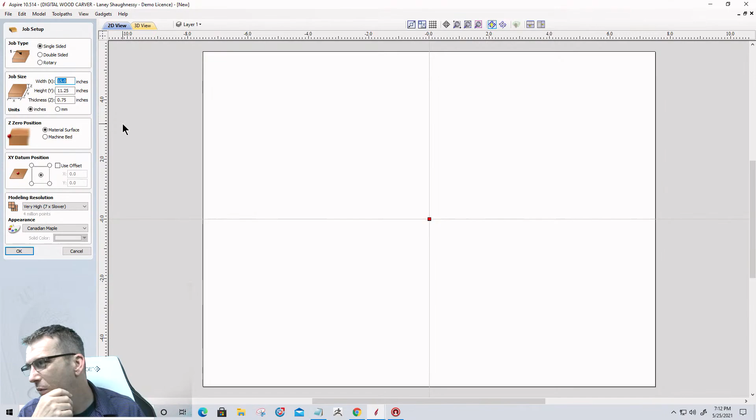The things that would be pretty basic would be... what do we call them? Dresser type caddies. Pretty cool little caddies where dads after a hard day of work can come in, offload their change and empty their pockets, and have a nice little organized place to keep those things.

There are different types of signs and plaques that could be made. What I want to do is focus on making a box, kind of a keepsake box, or a dad's memory box, that might have some elements on it that could really register with your dad.

Register, if it might click, might be fitting. He could be a military guy, a veteran, a peace officer or a firefighter, or he could be just a carpenter or a handyman.

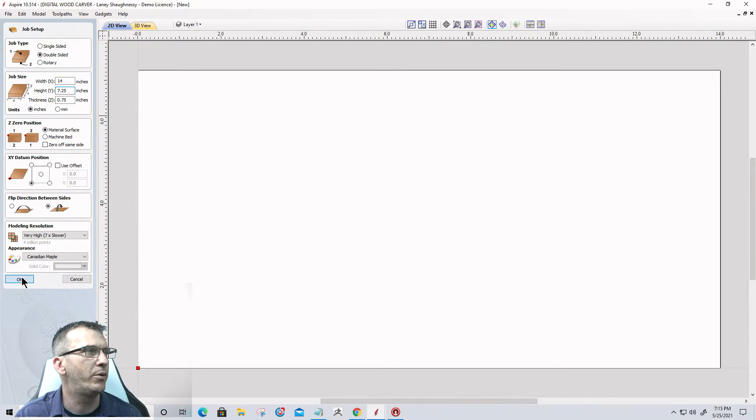I believe 14 by 7 1/4 — most people's CNCs, unless they're working on a small Piranha or something, will be able to carve that project, so it should be fitting for everyone. Again, I am in Aspire, but the things we're doing can be done in any of the softwares. Don't let my working in Aspire this evening make you think, oh, I don't have Aspire, I can't do this — yes, you can.

You very much can. So the first thing I'm going to do is lay out my box. My box is going to be 14 inches overall length, and it's going to be 6 inches tall, not 60, 6 inches. And it's going to have square corners.

Let's go ahead and get that on the board. For right now, I'm going to center it on the board there, so I have this upper area for clamping, this lower area for clamping, as well as being able to do alignment pins. That's where I'm actually going to start tonight.

I usually do the alignment pins last, but I'm going to go ahead and draw them in. Somewhere right over here, I'm going to throw in a 1/4-inch diameter hole, right about there, and also down here. Now, because of the method I'm going to use for the alignment pin holes, they don't need to be perfectly aligned or in the same place in the same corners.

I just need 2 holes. They could pretty much be anywhere, and I'm going to go diagonal with them, but they don't have to be exactly in the same spot. So that's going to be my alignment pin holes in the waste areas here.

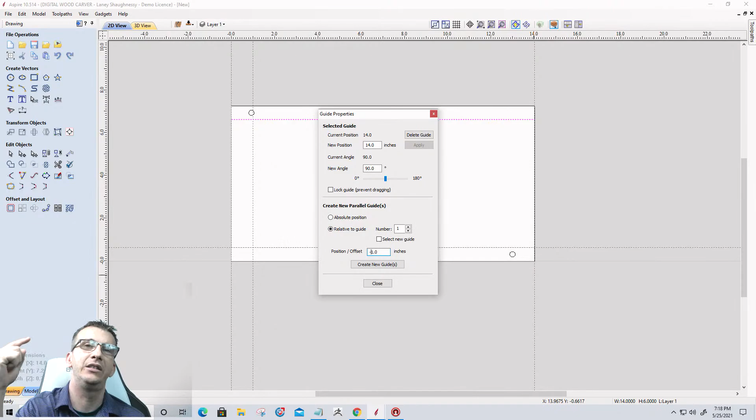You can rotate that guideline, you can create relative guidelines parallel to it, and that's what I want to do. I want to create a relative guideline 1 inch away, positive because I want to go to the right. Now on the guide on the right hand side, I'll right click and do another relative guide, but this one's negative 1 inch because I need the guideline to go to the left. So we're going to create that guide.

Now I can take my rectangle and go into node editing mode, zoom in really tight on the guideline, and insert a point right on that 1 inch guideline on the right, then zoom in and insert a point on the left side. If I zoom in more, you can see I missed my mark, but no problem, I can just drag that over and snap it right to the guideline. That's why I want to zoom in really tight to make sure I'm on the guide. Even here, I missed that one as well, so I'll snap it right to the guide.

Now right in the middle, there's always a little invisible looking clear box, and that's the center line, the center point between two nodes. On a line, arc, or curve, you usually have a center point identified, and I'm going to put my mouse right on that center point and insert a point there as well.

So now what I've basically done is the bottom of this box is going to be one side, and I've divided it in half, so I've got about a 1 inch foot on this side as well as this side.

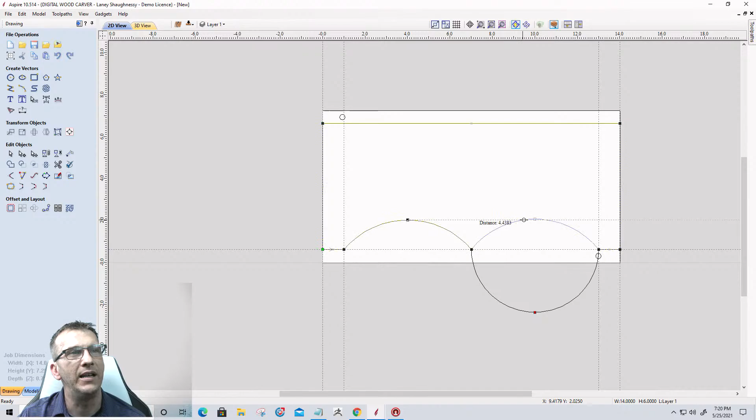And I'm going to do the same thing on the other side. Right click on the line and change that to an arc. Now I want to pull this one up and align it to here, but I need to wake up this node first to get that dotted line to shoot across. As long as I have my smart snapping and geometry snapping turned on, when I wake up a vector, I'll get that reference line, and I can snap right to it, so that way they're both the same height. That's going to be important for me.

So now let's get out of node editing mode. I don't want this sharp center here, I'd like a nice little curve, and that's going to be a fillet. With the fillet tool, I'm going to go with about... I think 1.5 is going to be too much. No, actually 1.5 is going to be good. I'm going to go with a 1.5 inch radius, normal fillet there. When I click on that center point, let me undo that... when I click on that center point there, it'll create that fillet. So this is going to be the side profile of this box here.

Now that I have that, I can go ahead and get rid of my layout lines. I'm on the top corner of my rulers, and I can click on that button to hide them, so turn them on and off. So that's cool.

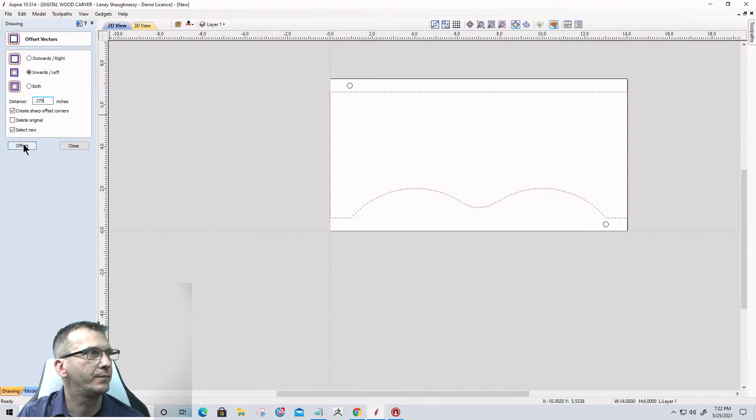All right, so now I'm going to take the profile that I've just created of this box side, and I want to offset it inward, probably about 3/8 of an inch. I think that would look pretty good. I do want to keep sharp corners because I want these corners in the top to be sharp when I create that offset. So we'll create that offset, and that's going to create this little window in here.

Now, within that window, I'm going to go ahead and draw a rectangle somewhere in here, and let's go with a rectangle that is a full 10 inches by 2.5.

I want to make sure that this is centered inside of this window. Now, if I go full center, straight center, it's going to bring it down low here, because it's basically centering it off the bottom of the feet and the top of the part.

I just want to make sure it's centered left and right. So I'll select this inner rectangle first, then select this inner vector last, always last, and align left to right to get that centered. If I tried to center completely, it would bring it down too low. I don't want that, I just want a nice layout.

I want to gauge my distance and make sure I'm pretty well even across. So I'm going to use the arrow keys on the keyboard and just bump it up, right about there. That looks good, eyeballing it rather than using an actual measurement.

And here I can do whatever - I can put in some text, I can put in a nice design, I could put in something cool that might relate to pops and stuff like that.

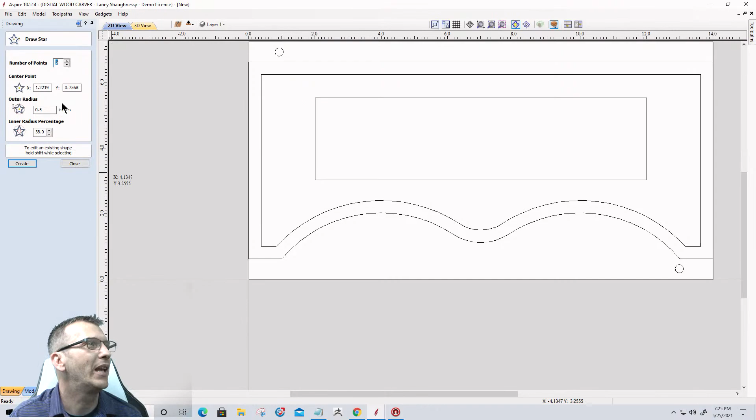I'm going to go ahead and create a star here, and size it down a little more appropriate - that's a little too big. Let's size that down to right about there.

Now I'd like to have them come around 3 sides or all 4 sides, whatever the case, and I want these stars to follow the path. So I'll take this inner rectangle and offset it outward a certain distance to use as my path for the stars.

Let's offset that rectangle outward, let's see, 3/8. Let me gauge this real quick - if I were to center that star in there, oh yeah, plenty of room. So let's undo that. Alright, 3/8 is good.

Now I'm going to use the follow tool, or copy along vectors tool, where I can take one object and copy it along another. Whatever I select first is the object I want to copy, whatever I select last is the path I want it to follow.

So I want to select that offset last, holding the shift key down when selecting more than one item, and use that offset tool - it's down here in offset and layout, copy along vectors. I'd like either a certain distance between them or a certain number.

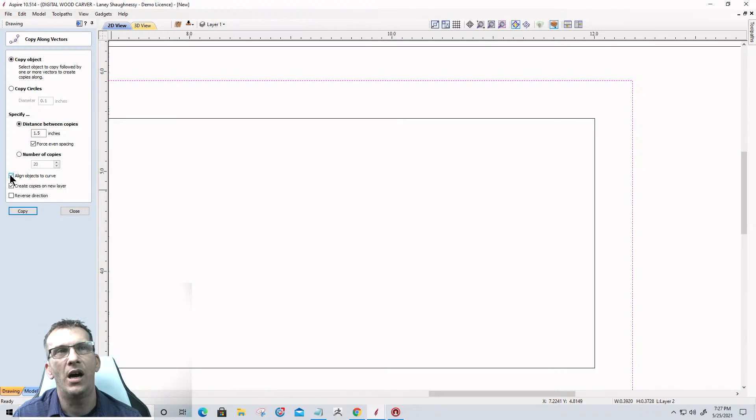Now, you see how the stars started to turn and rotate? I don't want that, I want them staying vertical. So let's undo that and uncheck the box that says Align Object to Curve. We'll uncheck that and pull that in. Okay, and everything landed almost perfect.

I'm a little off on my corners and everything, but I'm going to fix that right now. Everything else I like, but the corners I want to change.

So for this corner, let's start up here, and I'm going to snap the center right to that corner. Now, interesting, let's take our guideline here for a minute. Let's close this tool for a second, and if I take my guideline out of the top ruler here and bring it down, I should be aligned perfectly. Good.

All right, so let's do this one as well. And that one already is centered, so that's good. Down here in this corner, let's go ahead and pull this down and snap it to that corner. And over here, let's take this one, and that one is good as well.

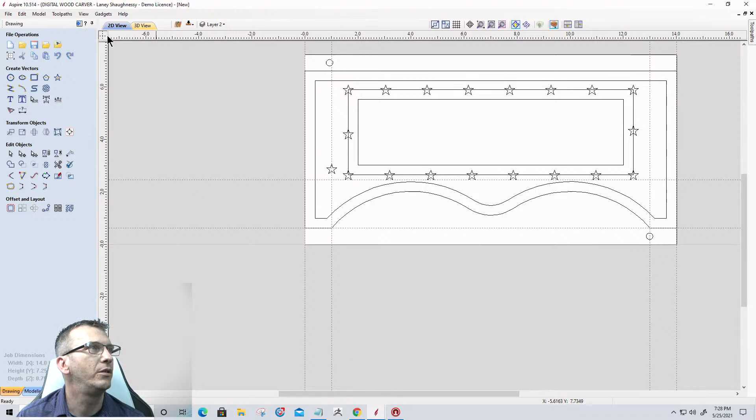Again, I can take my guideline just to make sure I can snap to the bottom of that star and just make sure that they're all nice and aligned. Okay, so I have that alignment. Let's go ahead and turn those guidelines back off, and I can delete my master little star there.

When you're creating stars, by the way, guys and girls, a little bit of a pro tip for you. When you create your star, your inner radius should be 38%. 38% gives a nice straight top part of the arch. So if I pull a guideline down on this star here, you can see that top line is nice and straight across.

If we were in, let me hold my shift key down. If I were to change that to, let's say 43, you see how it's angling up? Or let's say that I was at 35 - see how it's angling down? 38 is going to be your number.

And that, if you're ever doing stars for flags, for the unions or anything like that, it's 38. 38 is where it is. And that top leg has to be straight across. Okay, so all right, let's go ahead and turn that off.

Once we've done that, we don't need this vector anymore, so I can delete it. And we could have something like this, where the stars are kind of coming around. They're going to be raised. They're going to have nice points and everything to them.

They're going to be raised up and all. If you're in Aspire, you could just build that model - you could build those stars up as a model and stuff. But in Desktop and Pro, what we're going to do here, we're going to use the V-Carve toolpath to kind of pocket out that area to raise up those, give those stars a nice raised look. So we're not doing really any kind of model creation on this, but you could, right?

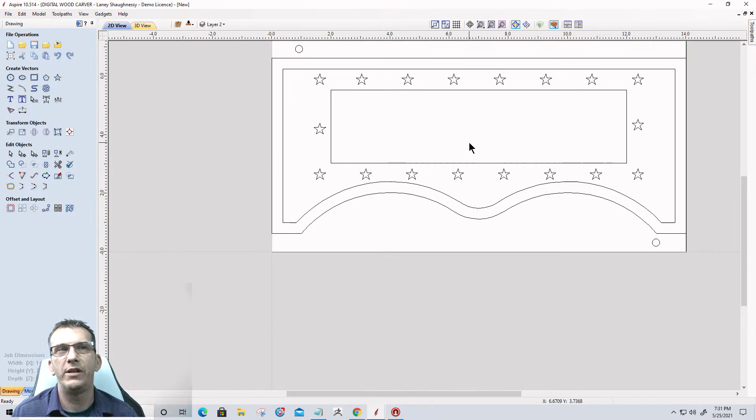And we're going to have two sides of this box, and they're not going to be identical. They're going to be very similar, but try to change it up a bit. Put something different on one side versus the other. We're going to create side 2 here in just a minute. We're going to make a copy and stuff, but try to create something a little bit different, a little bit unique, and things like that.

Now, since I said that, let's go ahead and do that right now. I'm going to select this here, and I'm going to hold down my control key, and I'm going to drag a copy right straight down. Hold that control key, and I'm just going to drag a copy down, which is going to basically kind of represent my front and back side, or whatever it could be.

Now, the joinery on this box is super simple as far as that goes. The joinery is going to be basically just kind of a butt joint. Since it is a two-sided job, we could do a half lap kind of joint type of thing. But it's going to be just a very simple assembly on this box, just kind of a butt joint, glued together. And we do need to create a groove on the back side for a bottom panel, at least.

So we've still got to create the bottom panel, the two sides, and the top. Before we get into the next step here, let me answer a couple of questions.

Laney, do you do classes on the weekends? Chris, are you talking about video classes? Or are you talking about the training classes that I do with customers that subscribe to the training?

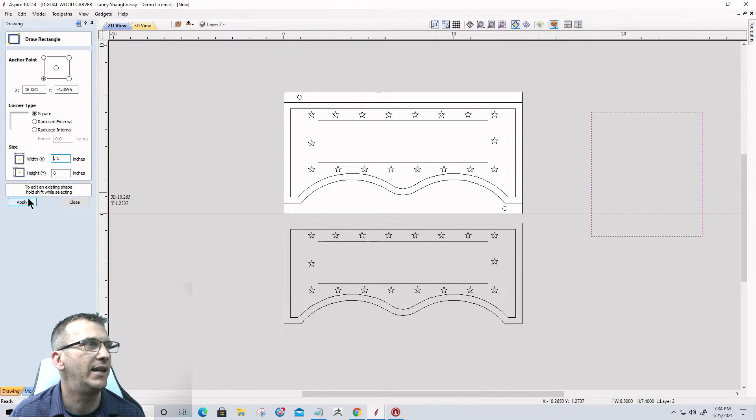So let's go ahead and size that. I'm going to need 2 of them on this side, so I'll hold down my control key and drag them down. What I'm basically doing here is laying out all the parts in one job, one layout. What I'll end up doing depends on the size of my machine, and now I have a 40-inch cutting area.

For the most part, except for the lid, I should be able to create the design on a long board and cut out all the sides, the front and back, and the 2 sides out of that one board, flipping it over as needed. But right now I've just got it laid out on a single piece here for whatever reason. We'll change that up in just a moment.

So we have our 2 sides. Now as far as the lid goes, we're going to do something decorative on it as well. We know the overall width should be 7 inches overall, and our box is going to be 14 inches in length. So 7 by 14 is what I need this lid to be. Now basically I've got all 3 parts laid out.

Now I am going to do something decorative on the sides as well. This is the cool place to do some type of medallion. It could be a military insignia, a fisherman if they're into fishing, a bow hunter, a deer, whatever they're into. Make it pretty cool for them. It could be a hodgepodge of different things too.

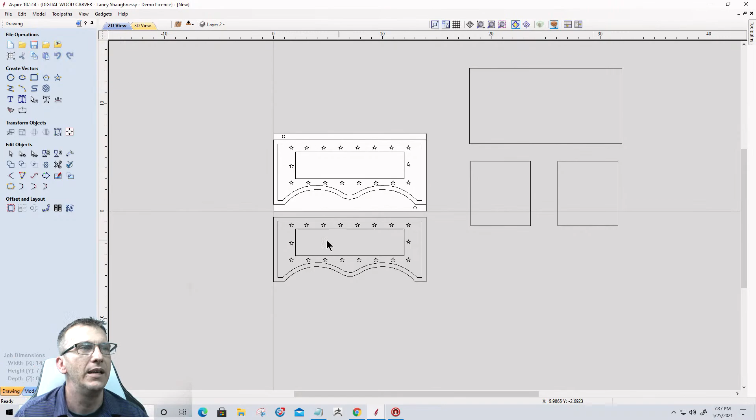But I'm laying out everything here, and then we'll start getting the projects ready to lay out so we can create our toolpaths. Now like I said, on the other side of the box, I don't want the same kind of layout—I do want to do something different over here.

So I'm actually going to remove the stars in that middle box from that side so I can do something different over here. Now, if I was going to put my dad's name on one side, I might write a nice little message to him on the other. Or I might create a nice cool scenery using some of the clip art in the Vectric software, like a fishing scene or an outdoor scene using those models. This is where you can really start to customize. If you're new to Vectric and haven't done modeling, it's not as complex or difficult as one would think.

There's a lot of videos on Spindle TV you could watch. They are longer videos, but the shorter videos in the help section of Vectric talking about model assembly are straight to the point. When you're bringing models in and laying them out, those quick little tutorials in the help section of Vectric will guide you very well. Some of my videos may help you too, but they're a bit longer to absorb. We're going to be changing that format in the upcoming months, making some really poignant, to the point videos that aren't so drawn out.

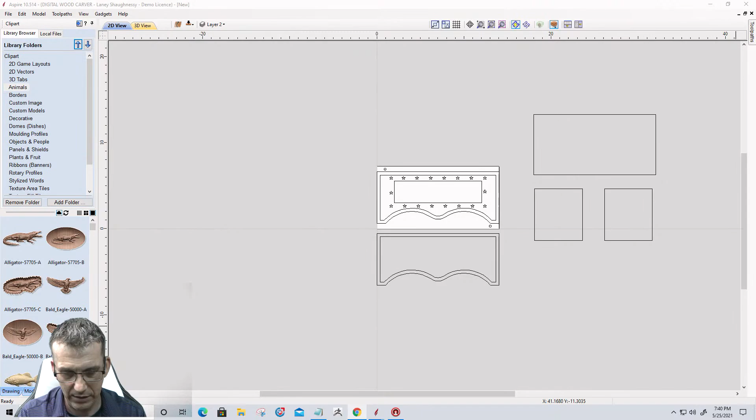My dad, when he was alive, was a country boy, all American and everything, so it might be fitting for him. I actually don't know if he had any military service or not. Like I said, I was kind of estranged from my father, so I don't really know what his history was before he passed.

But it could be something pretty fitting for you guys to think about. All right, so just for demonstration purposes, I'm going to go ahead and put in a name here. I don't know what I'm thinking here... Cook. And I'm going to throw this in for my grandfather, he helped raise me. So let's size this up.

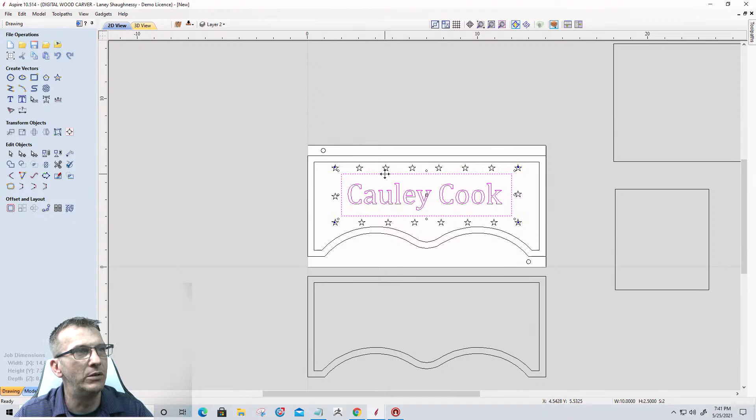I want to hold down the shift key and select that rectangle, and use my alignment tool to align to the center of that last selection, making sure it's centered in there. Okay, so that takes care of one side laid out.

Now that I have that side laid out, I'm going to go ahead and grab it, and drag it off to the side. I'll be able to put it back when I'm creating toolpaths. I'm going to use layers in just a moment, and we're going to separate our top, bottom, left, right vectors into layers to really organize things. But now I'm going to take this vector down here, this other side, and center it on my material, just to pop it in place so I can start working on it.

While we're here, let's go ahead and set up our layers. For layer 1, I'm going to rename this to be my left side. Layer 2, I'll rename to be my right side. I'm going to add another layer and call this my front panel. Add another layer, my back panel. And my top.

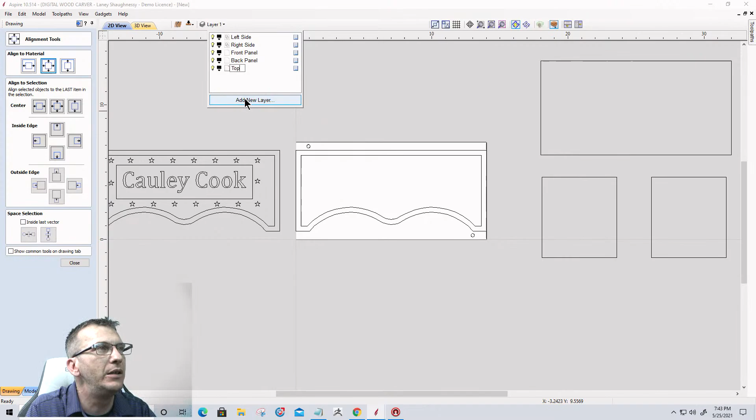I don't need a layer for the bottom, because the bottom is just going to use a piece of plywood that goes into a groove. Not 1/8, I'm sorry, is it 1/8? Hold on, is it 1/8? Quarter inch birch plywood, but the nominal measurement is 7/32.

Let me see here, plywood measurements. I used to know this stuff off the top of my head. Quarter inch is 7/32, yeah, 7/32. So that's your actual measurement. And also I got to remember it when I make my groove on side 2.

All right, so for side 2, I do want to add a little bit of a 3-dimensional element to give you guys some ideas about that. Or we could trace an image and create it as a V-carve and still have that kind of raised effect. Either one. If you don't have, well, everybody should have some kind of models in their clip art. Desktop came with models, Pro came with models, and Aspire came with models. We're not creating anything from scratch here. You should have some kind of models, but if not, we can trace some images and create some 3-dimensional designs by doing that raised effect.

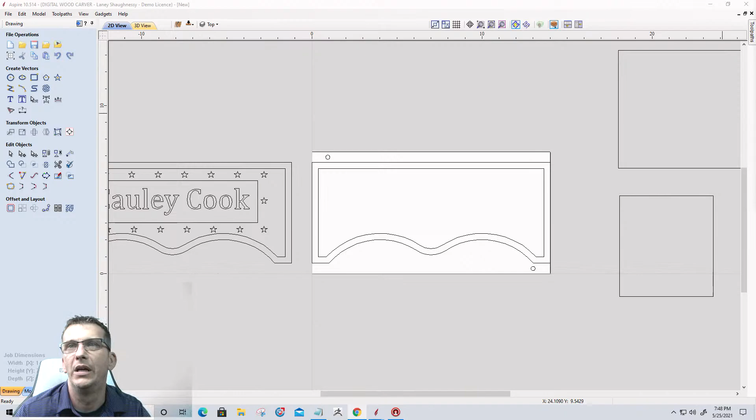So do I want a jumping bass or do I want a regular one? I've got different images that I've pulled offline that I can choose from. Let's see here. I tell you, this one, this image will give me a lot of options to choose from. Let's pull this image in. And let's go into our downloads. Let's see, there's, oh, that's a little guy. Where's my other one?

All right, this one will give me some options. Let me pull it over here. I think I'm going to go with this bottom one down here.

So let's go with a trace tool, and let's grab this, turn the fading off. I'm going to pull this up to 75 here, and I'm just going to draw a box around this guy right here and trace him.

And we can go ahead and get rid of that piece of trash there. This one here was similar, but it's really small, low quality, so it wouldn't be a good tracing. I'll go with this one here. Let's pull this over.

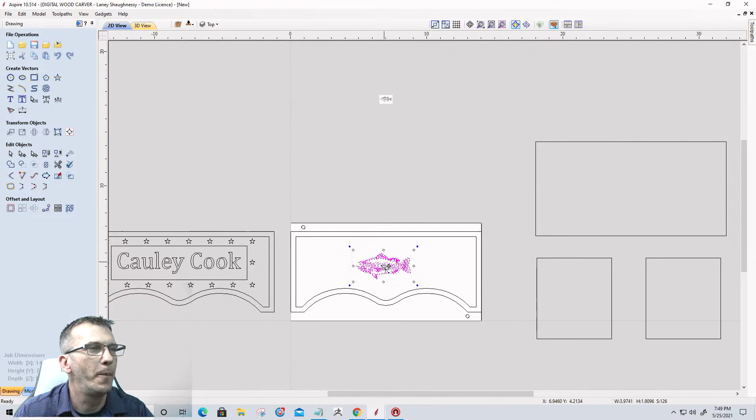Now my grandfather, he loved bass fishing, but he really loved speckled perch and all, but I don't have any picture right away that I can pull up of a speckled perch.

But now I want to align this left to right. Whoops, don't do that. I want to group that together first. Let's group this together. I'm going to hit G on the keyboard to group that together. And then I'm going to hold down my shift key and grab this here, and I'm going to align left to right to get that centered.

And I also I'm going to put a couple of fish hooks here. Now I'm actually going to draw those in. I'm going to draw that in and everything.

So let's see how well I can draw. I'm not sure. Let's see how well I can draw a fish hook from scratch.

Now I always, when I'm drawing shapes, I always start off with a rectangle. It kind of outlines how big I want the shape to be, and from there I can start to kind of create my shape.

So let's go here. We'll have a little narrow leg, and let's create a bit of a circle. Snap that to there. Let's bring that up a bit.

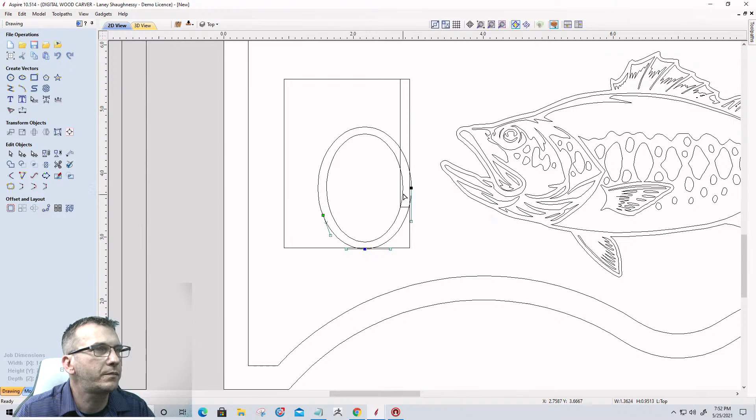All right, let's go ahead and go into do some node editing. Let's cut the vector down here and here. Let's cut the vector on this side as well. And here also. Let's get rid of this top half. Oops, what did I miss here? There we go, and get rid of this top half.

Perfect. Let's go ahead and move this out now. Node editing is your best friend when working with things and stuff.

Snap that there. Let's pull this one back here, and let's do some trimming. Trim, trim, trim. And don't worry about that jag. We're going to fix that in just a minute. That little jagged thing in the area there, we're going to fix that in a second.

In here, I'm going to actually do a three-sided, four-sided star.

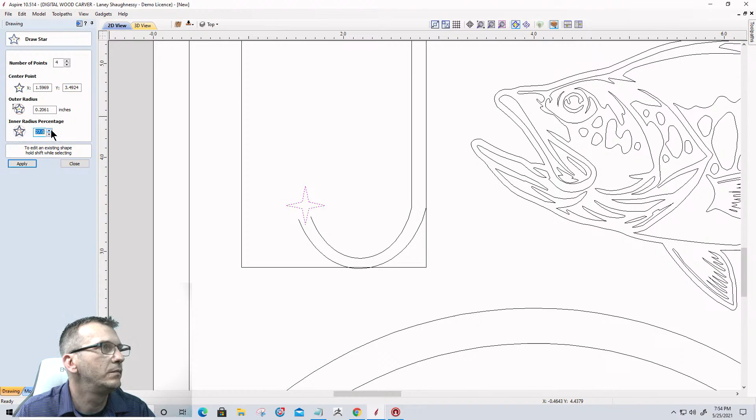Let's pull this down here for a minute. I want it a little bit narrower, so I am going to reduce that inner radius a bit. 20, not that narrow, let's go 25. That'll work. All right, let's size this up.

Now, of course, it would have been much easier to find a picture of a hook and trace it, but you guys aren't going to learn anything if we just keep tracing images.

We're going to go into node editing mode, and I'm going to select these two nodes right here, and I'm going to use the down arrow key on my keyboard, and I'm going to pull them down to create the point of that hook.

And then I'm going to go ahead and lower that. Oops, not that one. I'm going to go ahead and get out of node editing mode. Let's lower this down a bit. Right about here. Node editing.

Let's pull this up into this corner there. Let's pull this up into that corner there. And let's do some trimming with our scissors. All right. That hook looks a little worn out.

All right, now I can get rid of my rectangle so I can start to shape this. I still got to put the eye of the hook in. Let's get this. I want to move it over here.

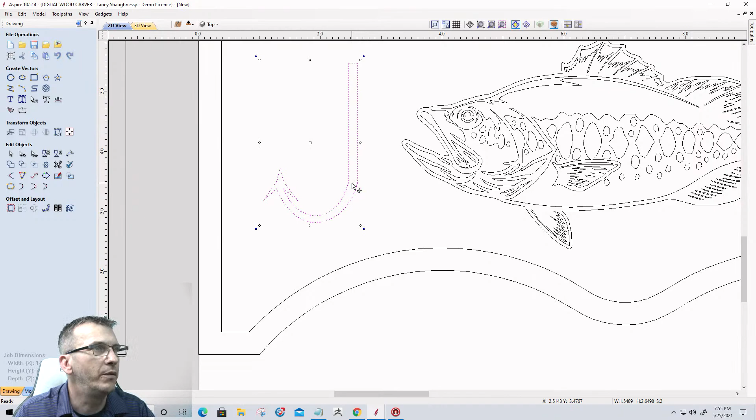All right, I want to go into node editing. Well, not node, first of all, I want to join those two vectors. So let's join down here. Join those two as one closed vector to close that up.

And then in node editing, I want to kind of fix and smooth out this point here. It's a little bit too rigid, and so I want to kind of straighten that out a bit. Same thing here, I want to smooth this, kind of pull that down and all.

And then over here on these nodes, I want to grab all of these nodes, and I'm going to use my right arrow key, and pull that up and around. Don't worry, we'll fix the hook in just a minute. And then my two anchors here, I want to pull them out a bit. There we go.

All right, let's get our eyelet on there. Holding the shift key down, I'm going to draw another circle out here. And let's do some trimming. So I want to trim this away, this, and that. Cool enough, okay.

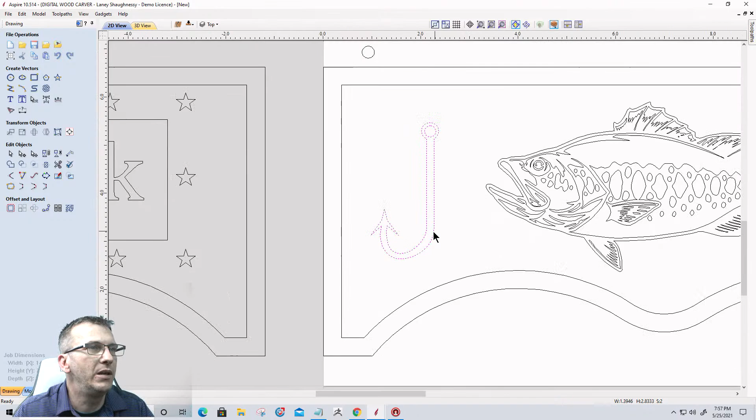So I want to mirror this. Let me make sure. Let me go into node editing one more time, and let me take these three nodes here, this one and this one this time, and I'm going to use my... what's going to be the best way to do that?

Actually, let me do it this way. I'm going to cut the vector here and here, so that way I can rotate this just a bit. Get it back into a decent position here.

And extend this line over to here and then trim, so I'll trim it with my scissors there and there. All right, so I just wanted to turn that hook a little bit. All right, so there's going to be my fishing hook, my fish.

I do want to put one on the other side, so I'm going to select all this and mirror it, flip it about job center, create a mirror copy, and flip it horizontally. So that'll be my right side.

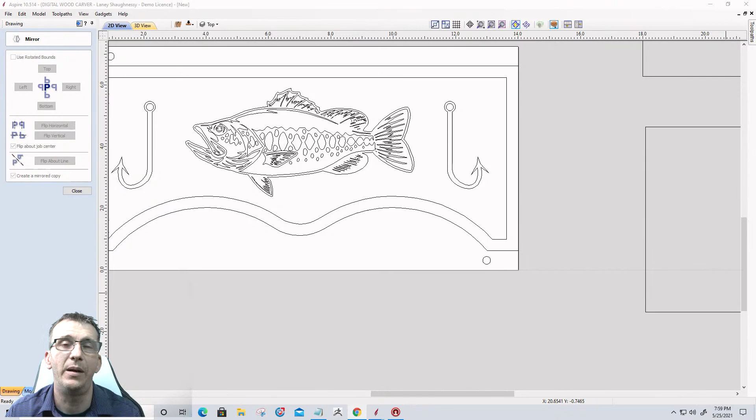Let's see here, okay, so let's take a look at what this would look like if it carved, if we carved it as a kind of a raised effect.

Now I want to take my bass here, I want to ungroup it, and I want to select just the outside boundary here and do an offset. I want to offset outward a small amount, and in this case I'm going to go about 1/8 of an inch to create like a little island around him. Okay, and now let's go over and look at the toolpaths on this.

So in our V-carve toolpath, I'm going to select all of my inner vectors. We're going to do a 0 start depth, 1/8 of an inch flat depth, 60-degree V-bit, and an 1/8 inch end mill for the flat area to get into these tight little areas. You could use a 1/4 as well, but an 1/8 is going to get us into some tighter spots. So I will calculate that.

And let's preview that visible toolpath. Okay, and so that's what it would look like if I carved it.

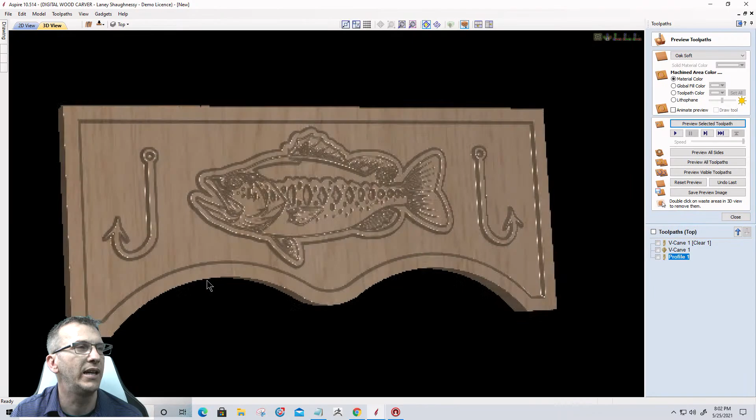So you can see what the side of that box would look like with just a simple V-carve here. If I were to color it in, let's say I were going to stain it or paint it, or whatever the case may be, I could really make the details stand out depending on what it was that I wanted to do with it, or I could just leave it natural, right? But that's going to give me that kind of carved look just from tracing an image and freehand drawing a little hook. It gives me exactly, nice little whatever, right?

Okay, so that's going to be my back side of the box. Let's go ahead and drop that down here, bring this back in, and let's create a toolpath for it.

Now we're going to select all of our inner vectors again, like that, and we're going to do a V-carve toolpath. Again, I'm going to use a 0 start depth, 1/8 inch. 1/8 inch is kind of my magic number. I really like the 1/8 of an inch flat depth with my 60-degree V-bit.

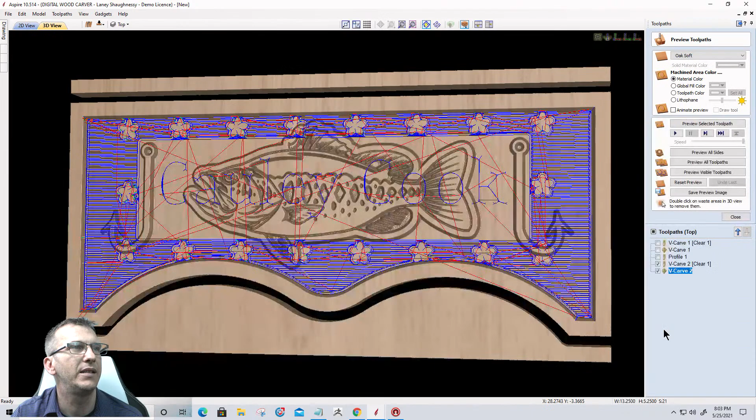Let's reset that preview and preview that visible toolpath. Okay, so we'll have that look going on there.

I could add a little bit something, maybe a little bit bigger text, a little bit fatter text, a little bit of boldness to it so it's not so thin. I could do that text raised as well and kind of create a boundary around it.

But we have this side, and again, if we did a profile cut for it, for preview purposes only, cut that out. Okay, that would be our

box here. And again, maybe something a little bit more fitting. Don't know if the stars are fitting for this, but use your thoughts and what you would want it to be. Now we're going to set everything up here in a minute.

We'll create all the final toolpaths in just a moment, but I do want to create at least one side here. I want to bring one side onto the board, and let's go ahead and center that onto the board.

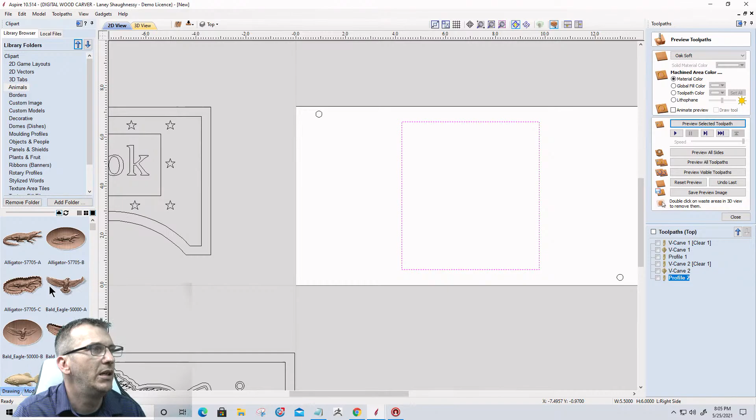And on this one, I could import a model or something, and everything. I could create something from the clip art that might really stand out, or give some decoration. It could be just a simple design of some sort that you trace, some kind of flourish, whatever the case may be.

This is going to be the side, and again, it's going to be butt jointed to the two edges. So the two edges, if we were looking at this from a side view, we would have our 3/4 inch foot here, our 3/4 inch foot here, and then of course the lid's going to be there. So we're going to have just this side that we can do something with, right?

And so let's undo that. And what I'd like is I'm going to create an offset inward. Now I could kind of stick to the same 3/8 of an inch that I did on the two sides to keep things consistent. But I also have to remember that whatever I do, it's going to reduce the working area that I've got, right? So we want to kind of create that working area.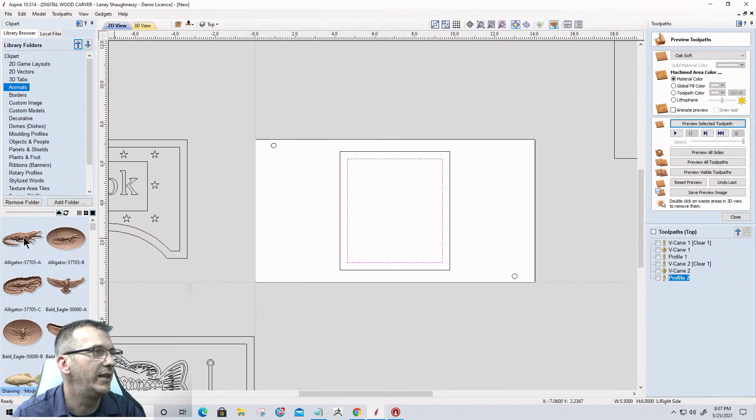I could just, like I said, do anything that really makes me think of him when I'm thinking of it. It could be an emblem, a military insignia, whatever it may be.

Now I'm actually going to get rid of that, because Grandpa, back in his day, he was a lineman, a telephone lineman, pole climber and stuff like that, and a cable splicer.

I'm going to see if I can find a silhouette or something that might be fitting for his back-in-his-climbing days. Let's see what I've got to work with here.

I need something that's rectangular in shape, that would fit, and this one's not going to have a whole lot of detail. I just want almost kind of a silhouette. Let's turn this off and import this other image in.

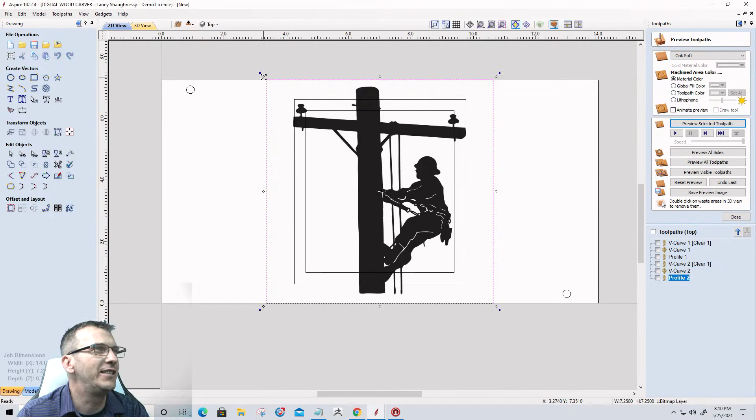Now the cool thing about my grandpa, 93 years old, back when he was younger, they would have races, like how fast they can scale those poles with their spikes and everything. Crazy stuff. He was fast on that and all, but as fragile as he is now in his older age, I can't imagine him doing the things he did when he was a kid.

But I'm going to size that up to right about there, and let's go ahead and trace that out. Let's turn off our fading, and on this I'm going to use 75, that's kind of my go-to setting. Let's preview, apply, and close.

Okay, and I didn't get a whole lot of detail in the shirt, I missed a little bit of that. Let me undo that, Control Z. Let's bring that back down to a 50, and turn that fading off again. Let's see if a 50 gives me a little bit more. Right there, that's better, all right, so we'll go with that.

Click apply and close, and again let's turn off our bitmap layer, that picture and all. This is going to be kind of a raised silhouette, if you will. So I'm going to select the inner vector and this here.

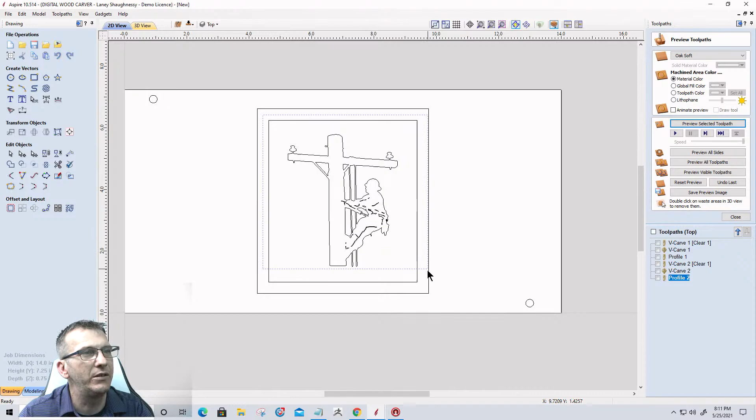And I'm going to do a V-carve toolpath. Again, 1/8 of an inch is my go-to on this, so I'm going to use my 60-degree V-bit, 1/8 of an inch end mill with a 1/8 of an inch flat depth. We're going to reset that preview and preview that visible toolpath.

And this, again, is just a silhouette of sorts, kind of that pole climber and stuff. And this one I would kind of give it some color so the detail stands out and things, so it really kind of stands out. I really don't know what type of wood I'm going to be using yet, but again, just something that kind of reminds him of his good old days and all that good stuff.

That would be kind of one side of that box. Okay, so I can pull this up, and again we're going to lay everything out, get an appropriate size board here in just a moment, and we'll lay everything out.

All right, now the other side here, since I've kind of got things tied up, I'm going to use the side here just to write a little message. So let's get that centered on the board here, and we'll go in.

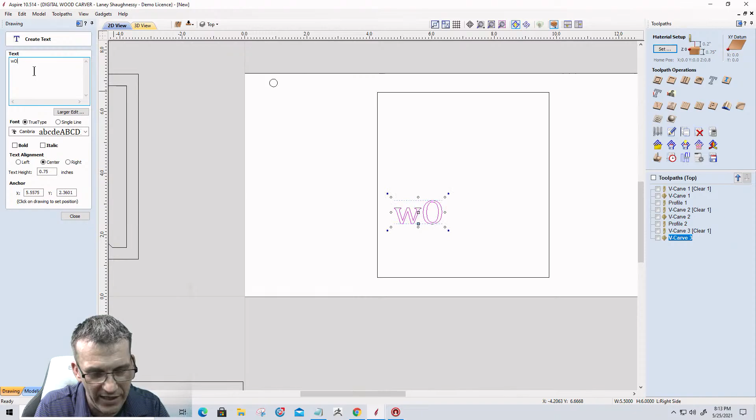Let's size that down a little bit. Let's go 3/4 of an inch tall, and I'll be generic right now. Let's go with world's. Let me learn how to spell world's. Greatest.

And I don't know if I want to put Happy Father's Day on this particular one because it's a keepsake box. No, we'll leave it out. But I can decorate this up a little bit more, it doesn't have to be so boring.

Let's go ahead and break the text block into lines. So when we right click on these lines of text we can break them up, now we can work with each line of text on its own. And what I want to do is size these two things down just a little bit.

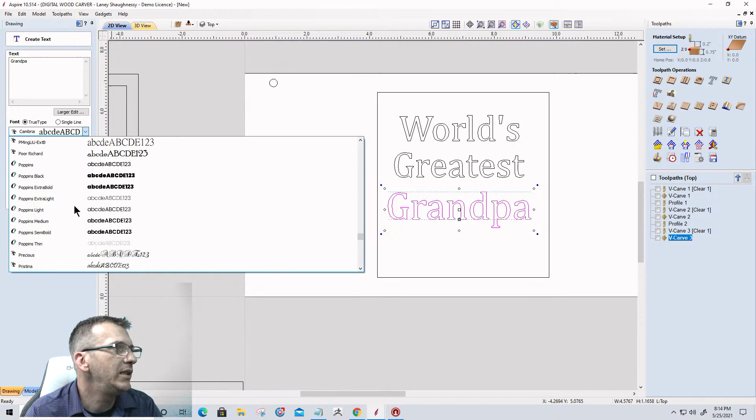About there. And I'm going to change up the font of Grandpa here. Let's go with some Royal Signage, ABCDOR right here. We'll get everything centered up in just a moment.

I'd like one more time to resize this, I want this a little bit smaller. All right, let's get everything centered up. There we go. And let's go ahead, this one's just going to be V-carved.

Now I could do this again, I could do the offset and raise it in. And it might, yeah, let's do the offset and do the raised text as well so that everything is consistent all the way across, right? That would probably look better. Yeah, let's do that, offset inward 3/8 of an inch.

And then that's going to dictate the size of my text. And let's create the toolpath on that, keeping that 1/8 of an inch consistent.

We'll turn off that color for a minute, and we'll create that side. So far, not a bad looking keepsake box for things that kind of fit to him. I'm not sure about the stars, I'll have to debate on that one a little later, but not so bad on everything else.

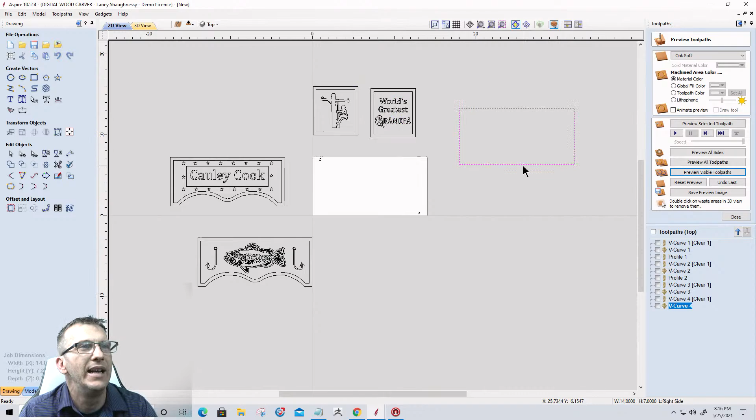So I've got my two sides laid out, I've got my front and back laid out, and let's go ahead and get the lid laid out. And then again, let me get rid of these alignment holes. I put those in there, but I'm not ready for them yet.

This is where I want to be. This is going to be the top of the box, the first thing he sees. And this would be an ideal place for something like a wavy flag, something that really stands out. Now I don't want it to go, I may want it to go edge to edge, or I may want it to be inside of a border.

I think for me, I'm going to go inside of a border. So I'm going to take my lid rectangle here, and again I'm going to offset it inward, but not that much. Let me look at 3/8... no, I'm going to go a little bit more than 3/8. I'm going to go a 1/2 inch offset inward. There we go.

And because I want some meat on the back, depending on how deep this is going to cut, I want some meat on the back, for hinges and stuff like that. I don't want my model going right to the edge because I got to think about the hinges and where they're going. So I want it set in a little bit.

Now I am going to import a model, the flag model I was telling you guys about. So we're going to import in from, excuse me, from my L drive. Nope, sorry, not L drive. From my... oh, stand by a minute. One of my drives was missing. It'll pop up here in just a second.

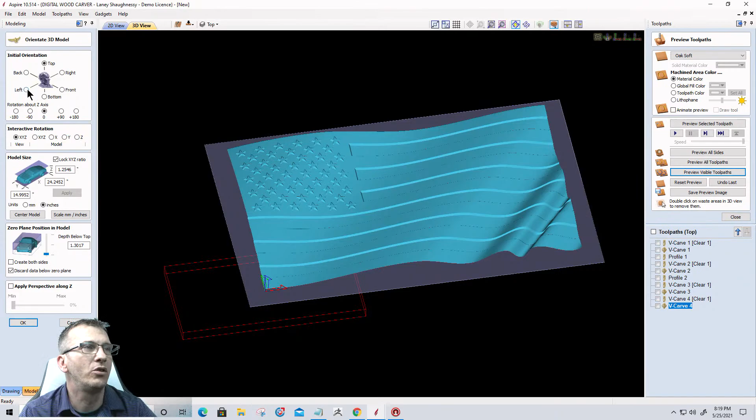All right, when we import an external model, the first thing we have to do is orientate it and size it to fit. So the first thing I'm going to do is make sure I'm orientated properly, and in this case I am, top orientation. Some models, when you purchase them, might come in sideways, upside down, backwards, all kinds of things. So we need to make sure we orientate it properly. The models you get from me are orientated top orientation, so they would be proper there.

And I want to size this down. So I wish I would have measured how big my inner box was. Let's see here, if it was 7 inches wide and I offset in at a 1/2 inch, that's 6.5. So let's go 6.5 because I want to go kind of edge to edge, and click apply.

I'm going to center the model, and then I want to slide this little slide bar all the way to the bottom, I want it sitting on top. Click OK. So slide it down, that slide bar to the bottom, and then click OK. And we'll import that model in.

Now let's close the preview so we can see the model here. So this is kind of the wavy model. Like I said, it might be too dramatic of a wave for this. I'm going to try to reduce the size a bit, but it's got a nice wave to it and everything.

Let's go into the properties of this, and let's look how thick it is. Right now it's about a 1/2 inch thick. I'm working with 3/4 inch material, so I'd still have enough meat.

I am going to actually bring it down just a little bit because that wave is kind of dramatic down here in the corner. I'm going to bring it down to 3/8, and I actually am going to, you know, I can scale this model. I don't want to skew it too much, but I can scale this model, and let's bring it down in size here to get inside this rectangle here.

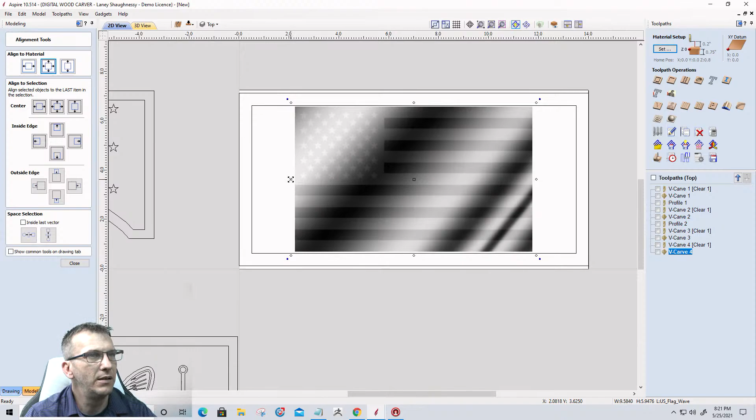Let me get it centered, let me get all of this centered. So this centered, that centered, my model's centered. Wonderful. Okay, so on this lid, I want to be very careful about stretching or skewing too much. I don't want to skew the model too much.

That doesn't look too bad. All right, I'm going to go there, so that means my offsets on the sides - if I hold the shift key down, I can bring them in a little bit. Okay, all right. Actually, let me go outward just a little.

Yeah, that'll be good. All right, so I'm actually going to use this boundary right here as my model boundary. So I'm going to go into my material setup over here on the right top, and I want to see where my model is positioned in my material. And it's at the top, and that's what I want.

Now this does have some curves and contours to it, so I am going to add a little skin about 0.010 of an inch above that model that has to get milled away before the model starts getting formed. This is going to ensure that I don't get any flat spots in my model from the top of my board being flat, just in case my board isn't quite flat and square when I'm milling and I didn't surface it. There's a potential I would get a flat spot by putting that 0.010 inch skin there, which gets milled away before the model starts getting shaped, giving me a little cushion, a little fudge factor.

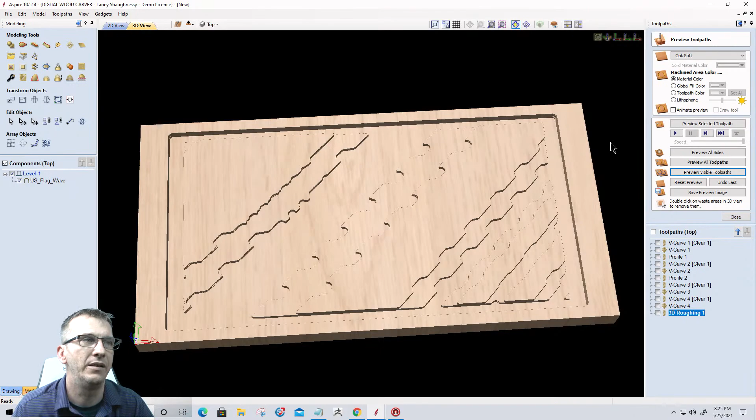Let's go ahead and create the 3D finish. On the 3D finish, I'm going to use a 16th inch tapered ball nose, for the reason that it's a small design and my stars are small - with an 1/8 inch ball nose I won't get the detail I really want, so I'll use a smaller diameter tapered ball nose. I do not want to do a boundary offset here; I am going to do the selected vector as the boundary again, which is that rectangle. I'm going to raster that, and we're going to calculate that finish cut.

What should occur is we should have a nice channel all the way around this flag, with the flag alone in the center, and then our lid. If you don't like dead space at all, you can do something on the top over here, but you don't have to fill every single space.

What we're doing is just kind of creating this memory box of different things. For him, fishing - he used to love fishing growing up, a little too old to hold a rod and reel right now. He used to be able to sit for long times out on the boat. We'd go out on the boat and stay overnight, all kinds of neat stuff, and he's just unable to do that now. So a little keepsake box to remind him of those days, and climbing poles - it could be a sad box or it could be positive. He might like it and it might bring back good memories, or he might think of all the things he can't do anymore and make him sad. Who knows, we'll find out.

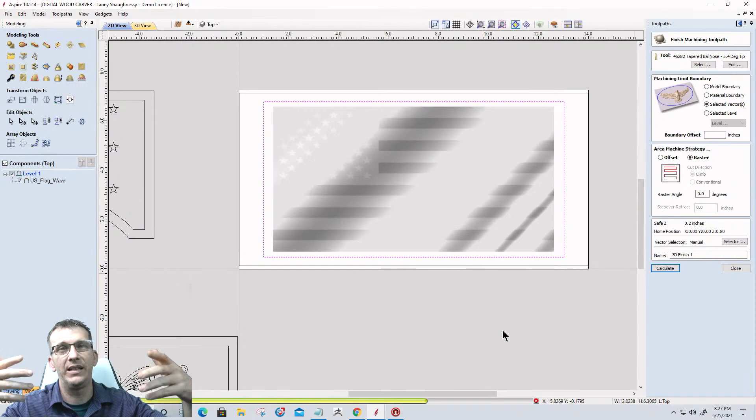Now, once I have all of my components, this is the last component here. Once I have all the components, then I need to start laying out the board for how I'm actually going to carve the parts. And then I also need to get my other side and do my grooves on all 4 pieces, for the bottom part.

So let's preview this here. It's going to take a moment to preview. I should have turned the resolution down for a minute. Let's close this up for a second. I'm going to turn down the toolpaths preview simulation quality, just go high for the moment, and preview the selected toolpath to run through that a little bit faster, because we'll get the idea and don't have to sit here and watch paint dry.

And so that would be the lid. Now, once again, I could even do a little bit of small text in here and have it follow the curve. That's called projecting. I could write something in here on the stripes, like Happy Father's Day 2021, whatever the case may be, or write some kind of sentimental something, or just leave it as is. It would be fine just as is, a nice little inset lid and stuff.

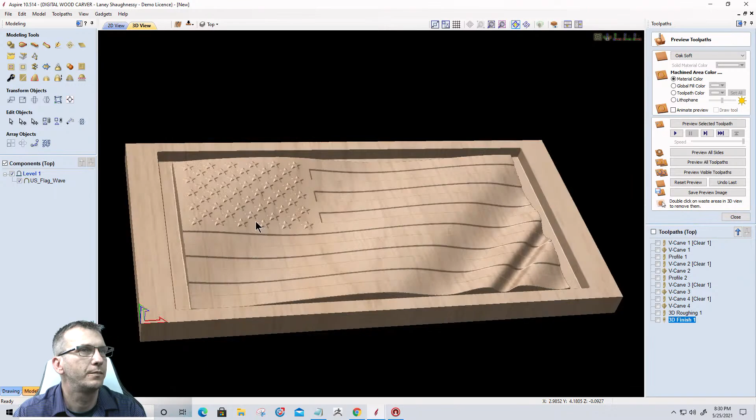I've got to think about my hinges on the back. They're going to be on the underside, I think, the hinges are. Let's break the edge just a little bit.

I'm going to select our vector outer perimeter here, and I'm going to use the chamfer toolpath. Now, if you don't have the chamfer toolpath because you don't have version 10 or 10.5, you can just do a profile cut with a V-bit and use a negative offset allowance to bring that V-bit in a little bit on the outside of the line so it cuts on the line to create a nice chamfer.

I'm going to use the chamfer toolpath that's in 10.5 here in the Desktop Pro or Aspire, and my start depth is going to be 0. I'm going to go with a 90-degree V-bit, let's go with a 90 on that one. And this one is going to be, I'll go with a 1/4 inch width. That'll be good, a 1/4 inch all the way around.

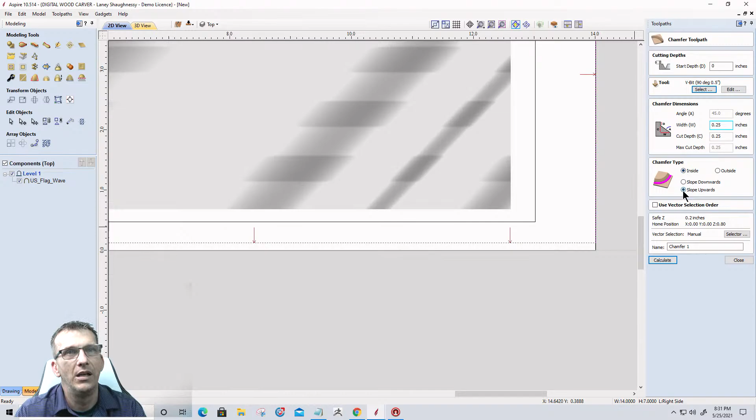And you see the little arrows that are pointing in? Now the arrowheads are the deepest part of the cut. They're going in the wrong direction right now, okay? This needs to be an inside cut sloping upwards, which means that from our line, the deepest part of that chamfer is going to be right at the line, sloping upward to the shallower part. So the arrowheads are pointing towards the deeper part of that cut. That means around the perimeter, the lowest part of that chamfer slopes upward to the shallowest point at the surface of our board, just a 1/4 inch up. So when we calculate that, we'll get this edge here that breaks that edge all the way around.

Now, looking at that - now of course, my box doesn't go all the way to the size of the board, we'll fix that in a minute with a profile cut. But looking at this on the top and bottom, that's just too much of a chamfer, right? It's just too much. So let's go back into that, and I'm going to reduce that a bit.

So on the width, I just want to break the edge, just a nice small chamfer to break the edge. So I'm actually going to go 1/8 of an inch on that. And let's reset that preview.

And on the back edges, because this board isn't sized the same, it's 1/4 inch more than the rest, we'll have to do a profile cut to cut it out when it's done. But let's look at that again one last time.

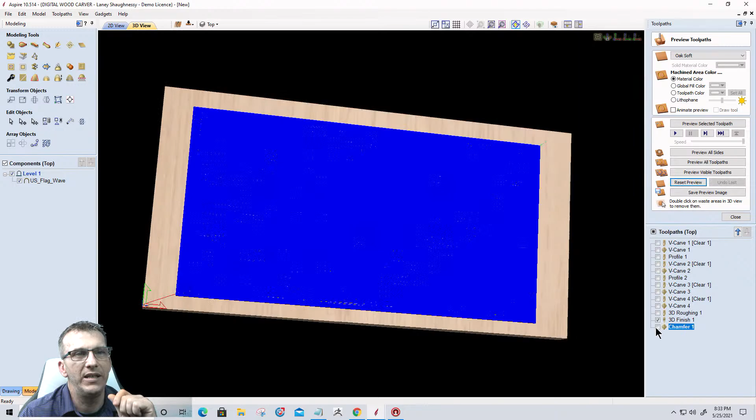Let's reset that preview and preview our 3D finish and our chamfer one more time really quickly, and then we'll lay out our actual boards and finalize this up.

Okay, let's do a profile cut on our actual perimeter. Let's do a profile cut with a 1/4 inch end mill, cutting all the way through.

So we can see the chamfer, and not too bad. I don't know if I'm a fan of that with it being so thin on the front and the back. Maybe if I reduced my little pocket that's around my flag a little bit, I could bring the pocket right up to it. I don't know, it wouldn't be bad. Just something to break the edges up.

All right, here we go guys. So we have all of our parts now. We're going to go ahead and move that over to the side. We got all of our parts. Now we're actually going to lay out the actual project that we're going to carve.

Now I have a 24-inch by 40-inch cutting area on my CNC, and I don't like going all the way to my 40 inches. So I'm just going to go 36 inches, a board about 30 to 36 inches long.

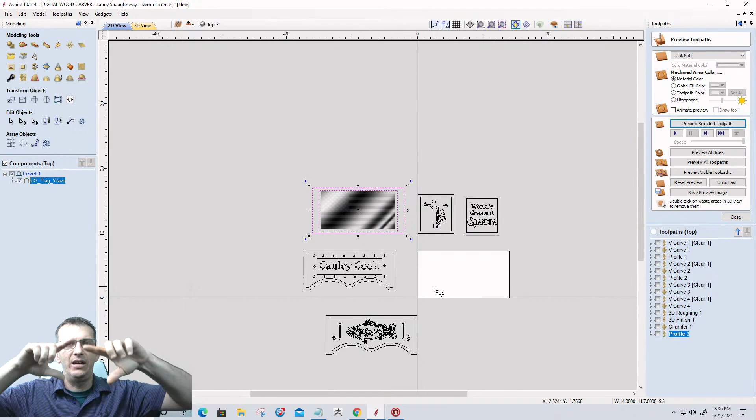But you could do something like this with the box gadget, but your box is going to be completely different than this style because you've got to account for the fingers that the joinery of the box gadget creates.

Let's grab - I'm going to be cutting the parts out with a 1/4 inch end mill, so I want to make sure I have clearance in between, and that'll be fine there.

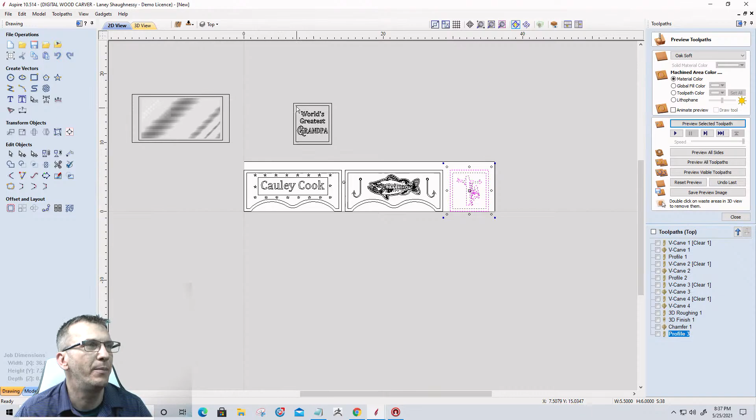Let's grab our left side. Oh okay, so on one board I'll be able to get the front, back, and a side, and on another board I'll be able to get the top and the other side, which is fine for me.

What I am going to do, though, is take all of these and align them up and down center there. And let's pull this one in a little bit. And let's pull this one back a little.

All right, while I have that 1/4 inch dot there, I'm going to go ahead and use that for my alignment hole. I'm going to throw one right down here. And I'll hold down the control key and drag a copy, and I'm going to throw one over here. Okay, all right, and let's go ahead and take all of this, and I'm going to copy it to or move it.

Let's see here, I'm going to copy it to a new layer. This will be board 1. Okay, and then I can turn that off for a minute.

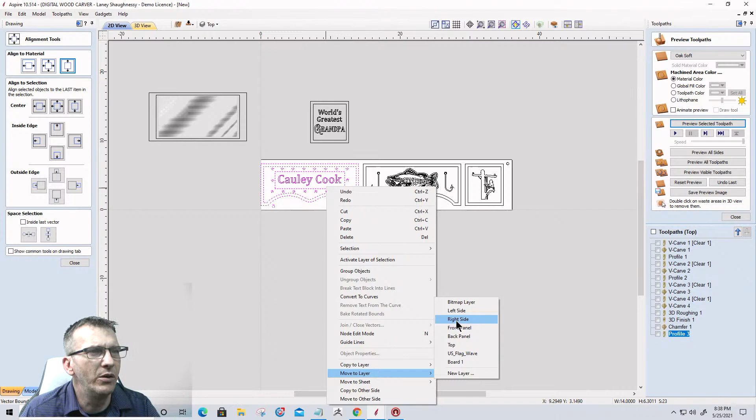I'm going to go ahead and organize my layers now. So I want to right click and move this to my front panel. Which is going to be the front panel, the name or the fish? The fish is going to be the front panel. So this will be my back panel, and this one will be my front panel.

Move to front panel, doesn't matter about my sides. We'll call this one the left side, and we'll move that to the right side. And we'll take this and move it to the top. So now I've got everything separated by layers.

I can go ahead and turn off - I've got everything also copied on that one board, laid out just like it is here. I can turn off my front panel, my left side, and my back panel. Oops, left side, turn that off.

And now I can take my top here, move it into position, take this side, move it into position. I won't need a 36-inch board for this. I can cut this out of a shorter board, but for right now we're going to leave it at 36 inches.

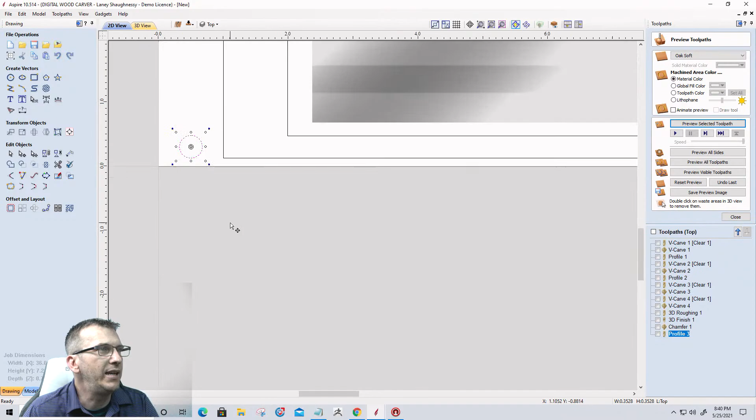I'll throw this here. Let's get this centered. Holding the control key down, dragging a copy of that 1/4 inch hole there. Okay, so with that, let's move this a little bit closer, let's move all of this a little bit closer. Waste not, want not.

Okay, with that I can go ahead and select all of these and copy them, copy to layer, and this is going to be board 2. All right, so what I've got here now, if we look at everything, board 1 has everything laid out for board 1, board 2 has everything laid out for board 2, and separately I have my top vectors, which those 2 holes don't need to be there.

Let's fix that right now. There we go, I got my top vectors and model, I've got my back panel, my front panel, I've got my right side, my left side, and everything is nice and organized in case I want to change one element or the other.

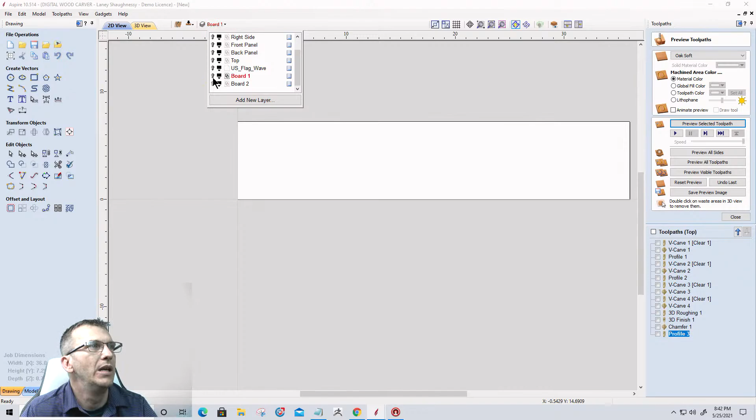But now these are the two layers that I'm working with, board 1 and board 2. So on board 1, because I've got to put the groove for the bottom of this box all the way around, I need to go ahead and take my outer vector for each of these along with the two holes, and I want to copy those to the other side.

Copy to other side. Okay, turn that layer off, turn on board 2. Take my outer perimeter here and here. Not the lid, I don't need to groove in the lid. Just this perimeter here, and copy, along with my alignment holes, copy that to the other side.

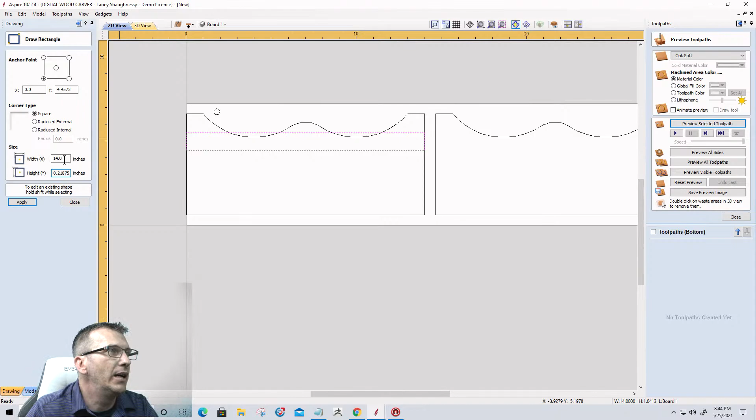All right, and now when I flip over, I should have board 1 and board 2. Okay, board 1 vectors and board 2. All right, on board 1, my groove, remember I said is going to be 7/32. That's the nominal measurement for the piece of birch that I'm going to use for the bottom of the box. So it's going to be 7/32 equals 0.21875 by 14, that groove.

And I'm gonna give myself a little bit of an allowance here in just a moment, but I'm gonna bring that down. I want the bottom of the box to be kind of right here, right above that curve and all on there. And I'm gonna go back into my size here.

That 7/32 on the width, or the height in this case, the height which is the thickness, I want to give myself about 10/1000 of an inch, a little bit of space so it's not just like a tight fit. And I may want to go 20/1000 of an inch because the plywood could vary slightly, right? You know, we want to be a little bit safe.

So what I'm going to do is I'm just going to add in, because I don't mind if the bottom is floating inside there, I'll meet it in the middle, 0.015. Hit equals, and let's try that again.

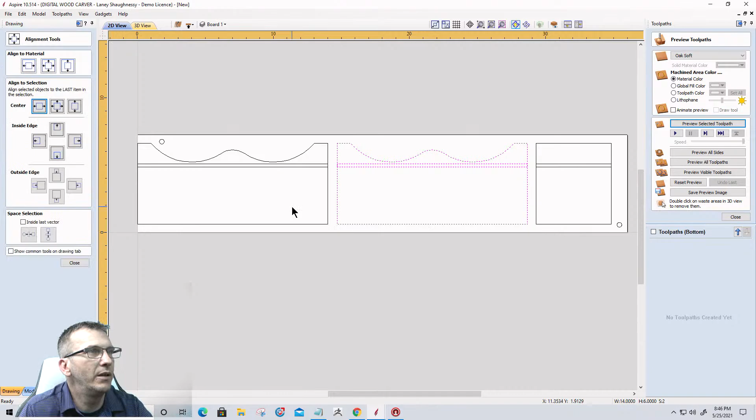Okay, get that groove sized, get this in position. I'm going to use my alignment tool to align left and right. There we go. All right, so all of my grooves here are aligned exactly where they should be.

On board 2, my board is in alignment, so my grooves should line up on that side as well. So I'm just going to take this one and copy it to board 2, so that way I can get it aligned right there. I'll hold down my shift key, select that, and align left to right to get it centered.

All right, this groove is going to be a shallow groove, maybe a quarter of an inch deep. So let's go ahead and start tool pathing this out now.

Let's start with board 1. We'll do the back while we're here. First thing is going to be my waste board alignment holes. That's going to be a drilling tool path, a quarter inch deep. I'm going to drill the alignment holes in my waste board.

A quarter of an inch deep, using a quarter inch end mill. I'm going to name this waste board alignment holes.

Hang tight with me, guys, we're wrapping up right now as we create the tool paths. All right, that's going to be my alignment holes for the waste board.

Now my groove, that's going to be a pocket cut. It's going to cut a quarter of an inch deep. Yeah, that'll be good. I'm actually going to use the 1/8 inch end mill for that. This will be my board 1, side 2 grooves.

Calculate that, and then my profile cuts. Going to be cutting 3/8 of an inch deep, halfway through on side 1, halfway through on side 2. 3/8 of an inch deep, quarter inch end mill on the outside of the cut. I am going to add tabs here, a 1/16 of an inch tab from each side, for a total of an 1/8 inch thick tab.

And we're going to go with a tab here, here, and here. I can sand that tab flush, that'll be good. Okay, so that'll be the tabs for that.

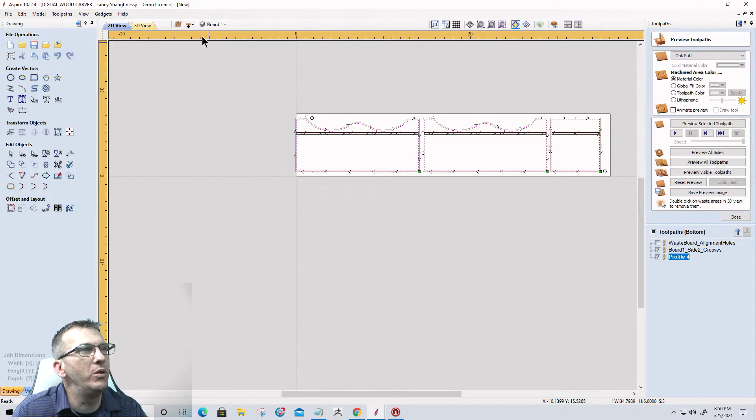What's important here is once I calculate this tool path, since I've got the tabs right where I want them on this side already, I'm going to go back to side 1 and delete these outer vectors on board 1, because on side 2 I'm going to take these outer vectors and copy them back over to that other side.

What I just did is, when I copied them back over, it copied the tabs with them. So when I do that profile cut here and add the tabs, they're already there.

Right, so I can just calculate this. This is going to be board 1 side 1 profile cutout, and it's going to be a quarter inch end mill. So we can calculate that.

Awesome, okay. So on side 2 for board 1, I've got my waste board alignment holes, my grooves, and my profile cut. That's all that's needed there.

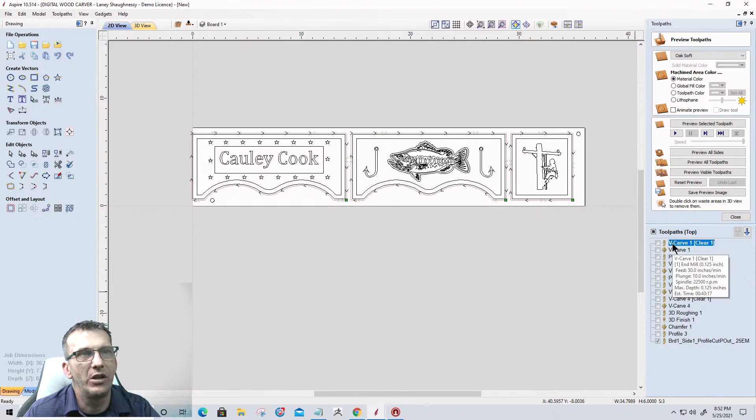So flipping over to the other side now, I need to reassociate my tool paths with this, and I'm going to name them and organize them. So the first thing I'm going to do is come back here and on the top V-carves, I'm just going to reassociate them with everything.

That's the one, this one here and this one here. All the V-carves are the same: 0 start depth, 1/8 inch flat depth, 60-degree V-bit, 1/8 inch end mill. This is going to be board 1, side 1 V-carve, 60 degree V-bit.

Calculate that. The vectors that are being ignored are my duplicates, we'll get rid of those in just a moment. And so now I can go in and... excuse me.

Board 1, side 1, 60-degree V-bit, and then board 1 profile cutout, side 1 profile cutout. Let's move that up in the list, so that'll be the top 3.

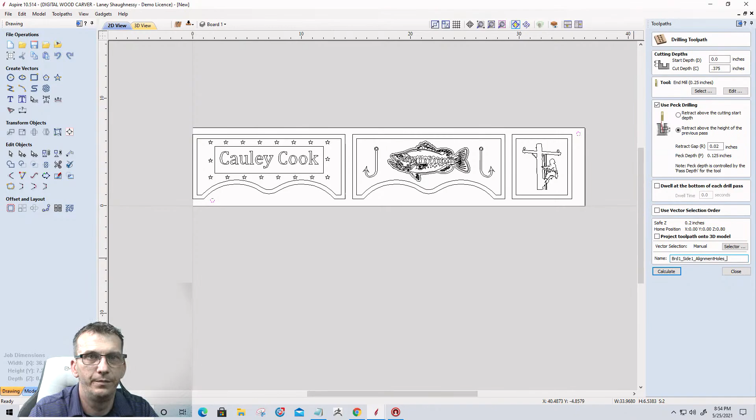My alignment holes are very important. Let's get those in there. Drilling operation, this is going to cut 3/8 of an inch deep in my board with my 1/4 inch end mill. I'm going to use pecking on it. This is going to be board 1, side 1, alignment holes. 0.25 end mill. That'll be the alignment holes.

Let's move that up, that'll be the first thing that happens on board 1. I always do the alignment holes first. So if we were to look at our board 1 here, we have our alignment holes, our V-carve, and then our profile cutout.

Let's preview that visible toolpath. Okay, so there's that side done.

The board would then get flipped over. When it gets flipped over, it'll be moved out of the way while I carve the wasteboard alignment holes in the wasteboard, put my 1/4 inch dowel pins in, and then drop this board into place. And then this will get its final cut of the grooves and the final profile cutout.

Let's preview that. One more time, let me do this again because I cleared the preview. Preview the visible toolpath.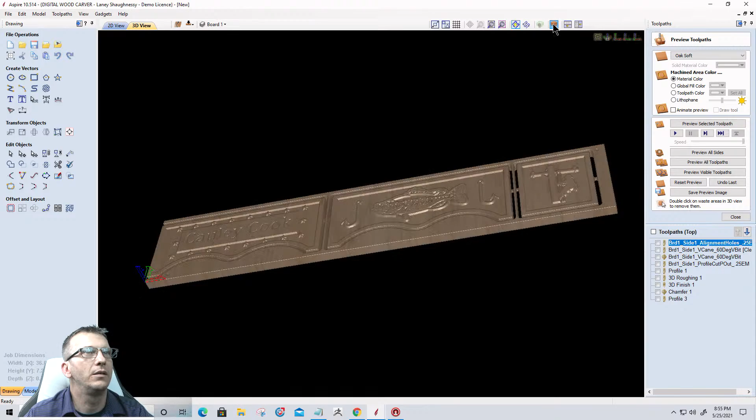Okay, side 1. Let me see here. There we go, so we got our back side. Let's flip over here. We got our back side panels in grooves and everything.

Now, the one mistake that I made here is on my groove, on the 2 end grooves, they don't need to be that long. They don't need to be that long because I don't want them to show on the side of my board, because remember, this is going to be - the sides are going to be glued right here and everything.

I don't want them to show, so I need to fix that vector really quickly. Let's flip back over to side 2, and basically, if I were to imagine my 3/4 inch board, right here.

My groove on the 3/4 inch board is getting cut in, again, 1/4 of an inch deep, so I can use my guideline. Let's take a guideline here, make a relative guide 1/4 inch away.

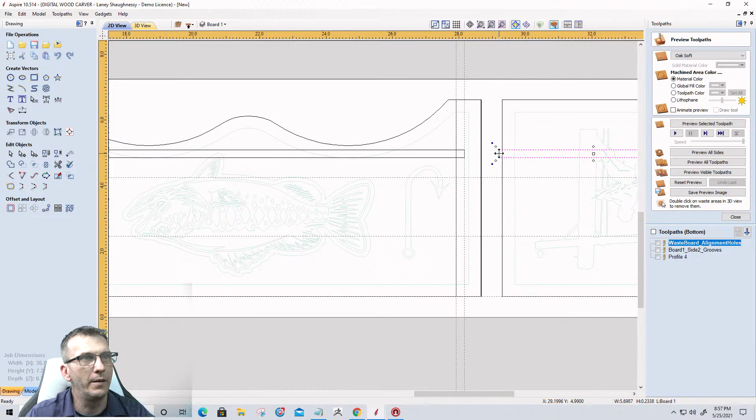And if I hold my shift key down, when I size this down to that guideline, it'll size both sides at the same time. This goes all the way through, so I need this to be extended past the board a little bit. There we go, that way I get a nice clean edge.

Take on this guideline here. I'm going to steal this rectangle for a minute, get this rectangle snapped to there. Make a relative guide 1/4 inch away, and then once again, if I hold that shift key, then I can pull that to that guideline.

I can snap to that guideline, and if I hold the shift key, it'll do both sides at the same time. All right, let's turn off those guides now, and let's recalculate that toolpath.

Okay, all right, so once again, reset our preview. Preview 1, 2, 3, 4. That visible toolpath. Preview this visible toolpath.

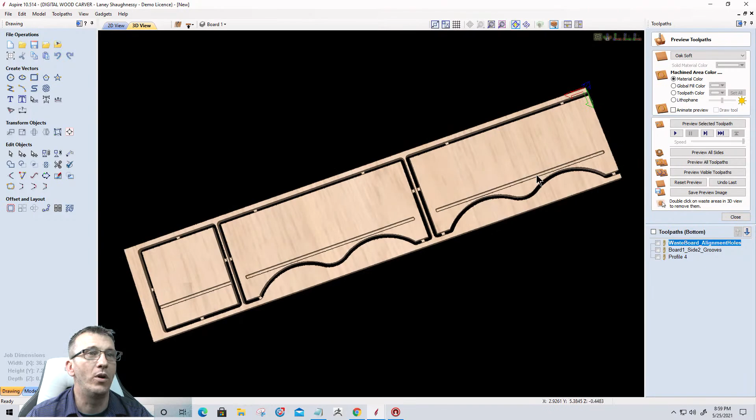And we have our two sides in our groove. Okay, our two sides in our groove. Now I have my board over here right up to the edge, trying to minimize material and stuff. But if I wanted to, I could have centered that and everything, but that's good there.

So now, last one, let's turn that off, turn on board number 2. And for board number 2, we have a 3D rough cut. So let's open that back up and change this to board 2, side 1, rough.

0.25 end mill, and recalculate that. Nothing changes with the parameters of that, and I don't have to select the model, it knows where that model is, but I did need to select the vector. Let's do that again, there we go.

Okay, so that's going to be my model cut. Here, let's select this, this will be a V-carve toolpath. Nothing changes with my parameters here, but this is going to be board 2, side 1, V-carve, 60 degree V-bit. Calculate that.

We'll clean up the name here in just a minute. All right, with that done, my alignment holes for board 2. Let's do that and put that. We'll organize them and put them in the proper order in just a second.

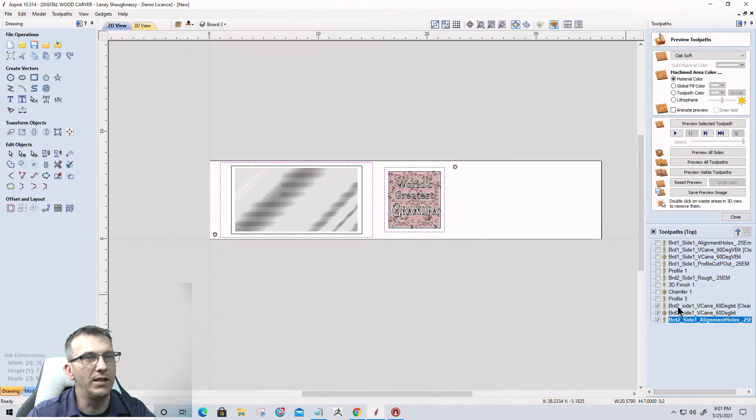Okay, the only thing I need to do is my profile cuts now, so this and this. Profile toolpath, cutting 3/8 of an inch deep.

We'll add some tabs here. We'll go 1, 2, 3, 4, 5. We'll just do this - 5, 6, 7, 8. There we go. All right, calculate that.

Board 2, side 1, profile cutout. Holy cow, almost there guys, bear with me, hang in a little bit longer. 0.25 inch mill. Calculate.

All right, so that takes care of side 1. Let's flip over to side 2. Side 2, we'll start off with our wasteboard alignment holes.

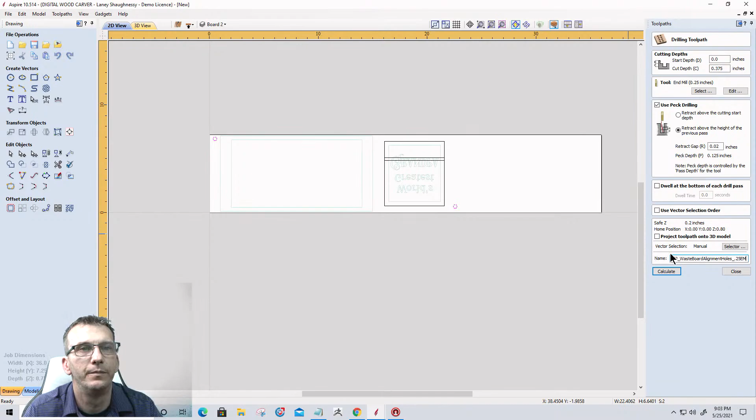Board 2, waste board alignment holes, 0.25 inch mill. This is going to cut in the wasteboard 3/8 of an inch deep. The groove, let's make that groove a little bit longer so it goes through both edges there and gives me a nice clean cut. That's going to be a pocket cut, 1/4 inch deep with an 1/8 inch end mill.

This is board 2, side 2 groove. Calculate that, and then the profile cuts. I'm going to delete this profile right here. I'm going to go back to side 1 and take this profile and this profile and copy it back over to side 2, the other side. Because what that does is it copies the tabs with it, so when I do that profile cut and add those tabs, they're there.

So this is board 2, side 2, profile, cut out, 0.25 inch mill. All right, so if we preview side 2, we've got our wasteboard alignment holes. We don't need to preview that. We've got our side 2 groove and a profile cutout. Let's preview that visible toolpath there.

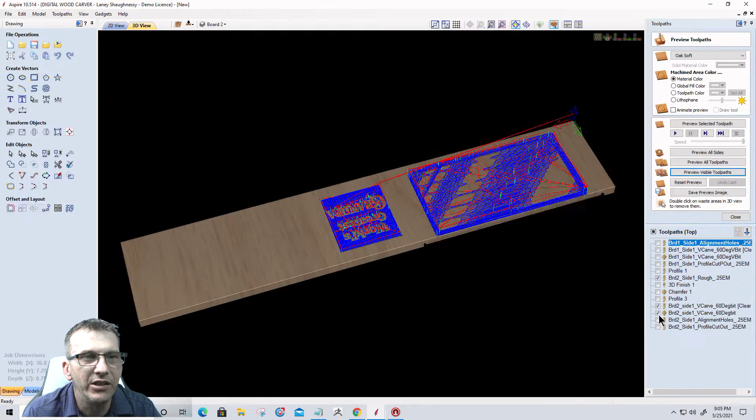Okay, let's flip it over to the other side, board 2 V-carve. Our model cut 3D rough. Where's my rough? Right there. I didn't calculate the finish. I got to calculate the finish. So let's do that really quickly.

Finish cut, selected vector is the boundary, raster cut with the grain. This is my board 2 3D finish. 0.0625 tapered ball nose, TBN. Calculate. Let that calculate, and then we'll look at it, and that'll be it.

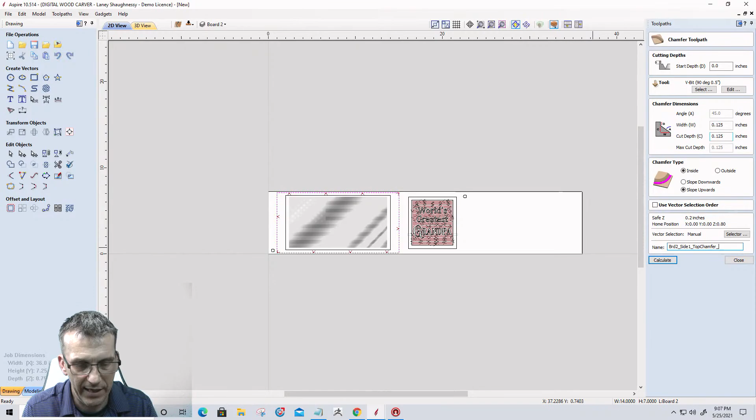There we go, and let's take really quickly and grab this. Go into our chamfer. Select our vectors there, nothing's changed with that. Still going just 1/8 of an inch to break the edges. It's still an inside upward slope. And this is going to be board 2, side 1 chamfer, top chamfer, and that's a 90 degree V-bit. All right, calculate that. Okay, let's organize these things.

So board 1 alignment holes and board 1, this can go away, delete that. So board 1 alignment holes, 1/4 inch end mill, then I got a 60 degree V-bit, and then the profile cutout.

I'm actually going to, on this, so I only need to change bits twice, move this down. I'll do the 1/8 inch clearing cut first, I will do the 60-degree V-bit next, and then my 1/4 inch end mill will do the alignment holes for that board and the profile cutout. That will take care of board 1, side 1.

That board will then get flipped over, and we'll do the wasteboard alignment holes. Let me rename this. Rename BRD board 1 wasteboard alignment holes, we'll do that first. Then our groove and our profile cut. Let me rename that. Board 1, side 2, profile cut out.

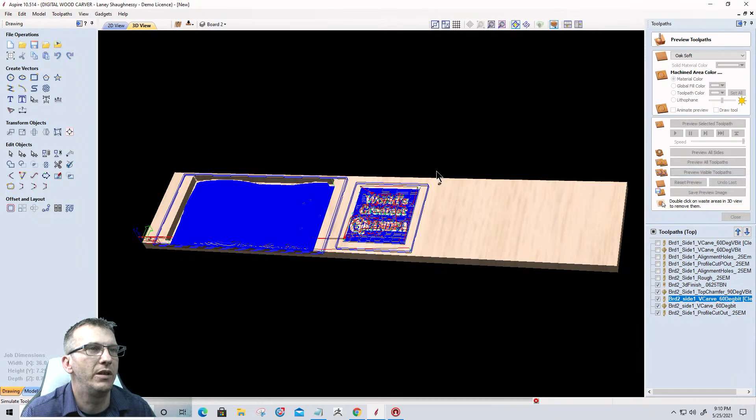So board 2, and board 2 could be shorter. It doesn't need to be 36 inches. I just need to make sure that my alignment hole falls in that.

So we've got side 1 here. We would flip that over. And then we have our wasteboard alignment holes, those will get run first, then our 1/8 inch end mill. I'll have the 1/4 inch end mill still in the bit, so we'll do... no, we got to change it, 1/8 inch end mill first. I don't know what I was about to think there. And then our profile cutout.

So we'll preview that visible toolpath, and so we'll have side 1 and side 2. And that's it. That takes care of our lid and everything for our little keepsake box.

So this box has an American flag on the top and the bottom. I need to find out what's going on right there in my 3D model. I don't know what that is in my 3D model. A little anomaly in Vectric.

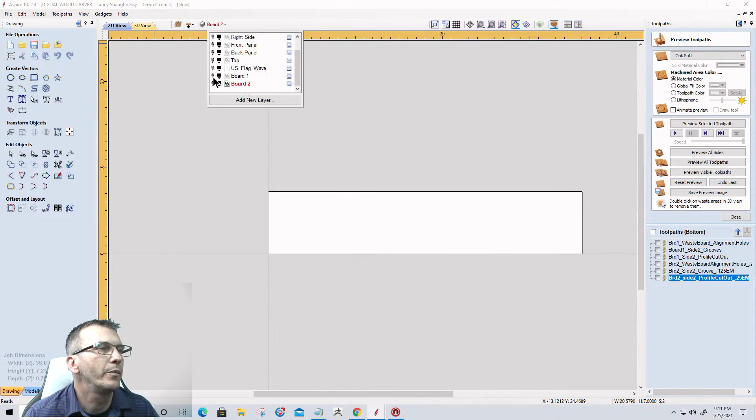But anyway, our 3D flag is going to be the lid. World's Greatest Grandpa is on one side, and that's going to be board 2. And then for board 1, we'll have his name. We've got the fish on the two sides, and then the climber will be on the other side. So a nice little keepsake box with all kinds of little things going all the way around it.

And that is that. Guys, I will organize these toolpaths and this profile. I'll make this Vectric file available to you, and I'm going to transfer it over to VCarve Pro. That way anybody with VCarve Pro 10.5 can just open up the design and make alterations to it.

For those of you that don't have VCarve Pro or Desktop, Pro or Desktop, or Aspire 10.5, if you're in an earlier version, I will provide the vectors for this and everything to you, and you can just recreate the toolpath. It's literally just a V-carve toolpath with an 1/8 inch flat depth and a profile cut and a drilling operation. Three toolpaths. It looks complicated, like there's a whole bunch on the list over here, but it's not bad. You can use this video to refer back to it and all.

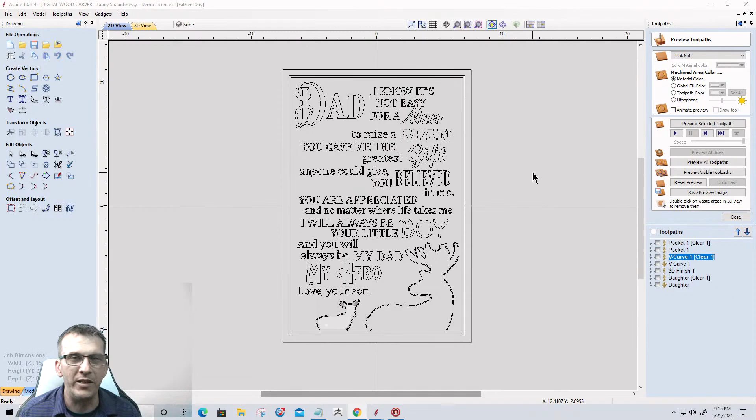Dad, I know it's not easy for a man to raise a man. You gave me the greatest gift anyone could give. You believed in me. You are appreciated, and no matter where life takes me, I will always be your little boy, and you'll always be my dad, my hero. Love, your son. This looks like this when it's carved, and it's a V-carve toolpath with a 3D model and everything.

We also, if I reset that preview, let's go back to this one. 3D finish. I know I'm missing a toolpath. That one, 3D finish, and that's it.

Preview that visible toolpath. This one is for the girls. This sign here says, as soon as it's finished, give it a second. It's a simple 60-degree V-bit, 1/8 inch or 16th inch tapered ball nose bit, and a 1/8 inch end mill.

Oops, it would have helped if I would have reset the preview before I carved that. Let's try that one more time. Oh, come on, Laney. Preview the visible toolpath. I'm missing a pocket cut somewhere. Right there. That, the pocket cut is right. Did I screw up my own thing? Hold on a second, guys.

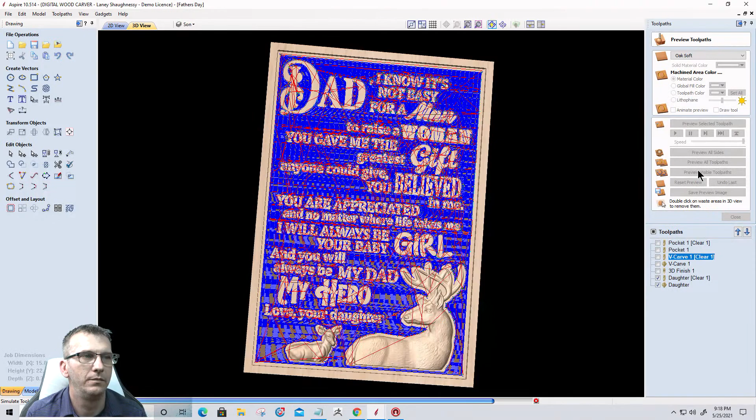Dad, I know it's not easy for a man to raise a woman. You gave me the greatest gift anyone could. You believed in me. You are appreciated no matter where life takes me. I'll always be your baby girl, and you will always be my dad, my hero. Love, your daughter. So we have one for the son, one for the daughter.

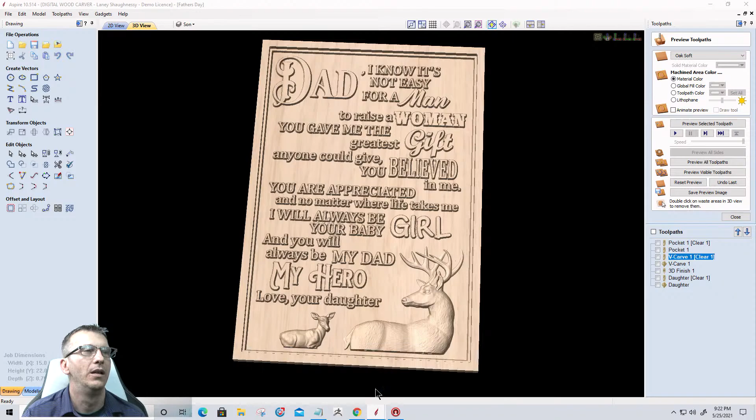This one is a 3D model, carved as such, but the other 2 Father's Day signs have a 3D model element too. They'll use a V-bit, a ball nose bit, and an end mill for a pocket cut. It should be very straightforward to cut out.

As for sizes, this one is kind of scalable, but right out of the gate, the World's Greatest Papa Bear is 15 by 11 1/4, so a typical 1 by 12 board, 15 by 11 1/4 by 3/4 inch thick material. It's got this cool bear head design with World's Greatest Papa Bear.

The father signs are 15 inches wide by 22 inches tall - wall signs or whatever you want to do with them. You will receive the vectors and everything.

For those of you who may need to rotate the entire project 90 degrees to carve on your CNC, you'll have all the vectors with detailed instructions and pictures on how to set up the project. I'll do little screenshots and stuff on how to set it up.